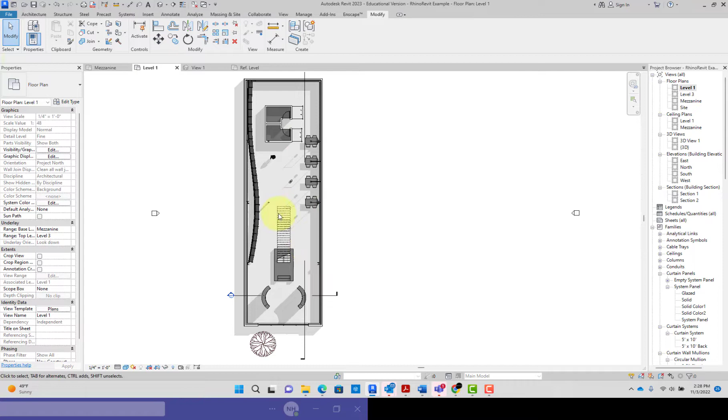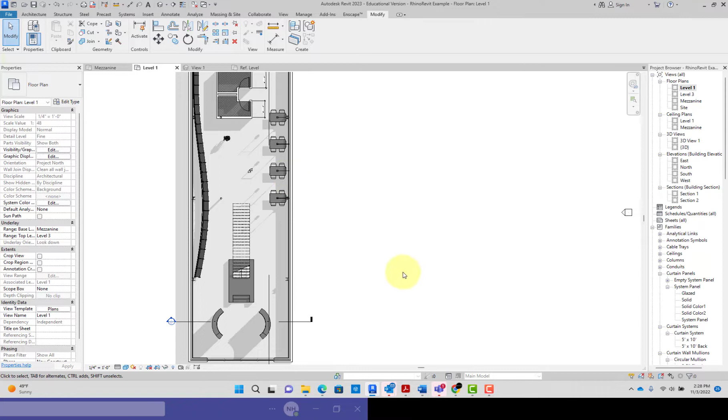Okay, the next thing we're going to do is add some control joints to your drawings. So if you have a monolithic concrete floor, maybe it's terrazzo, or it's anything that gets poured in place that is large, say an entire building or maybe an entire room that doesn't have anything breaking it up, like a tile pattern breaking up the tile into individual tiles. In this case, I have concrete, so you would want to place control joints as a designer, but it's important that you think of them as design intentions. Instead of having a very monolithic form, we want to break it up so it has more of a scale to a room or to a human body.

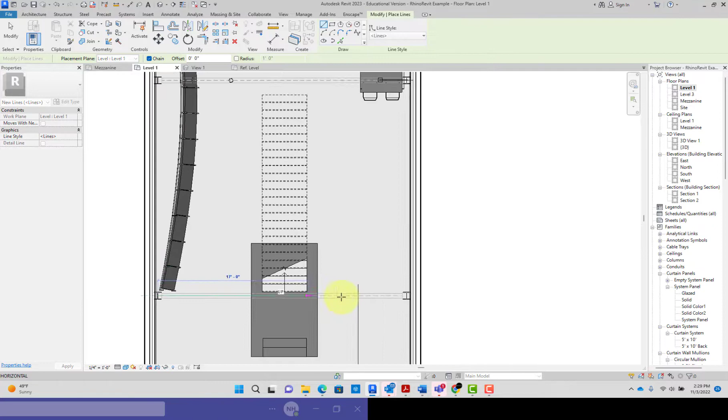So what we're going to do is use model lines. The beauty of model lines is that they're drawings that show up not only in the view you're in, but in every view. Specifically, we're trying to get them to show up in 3D views.

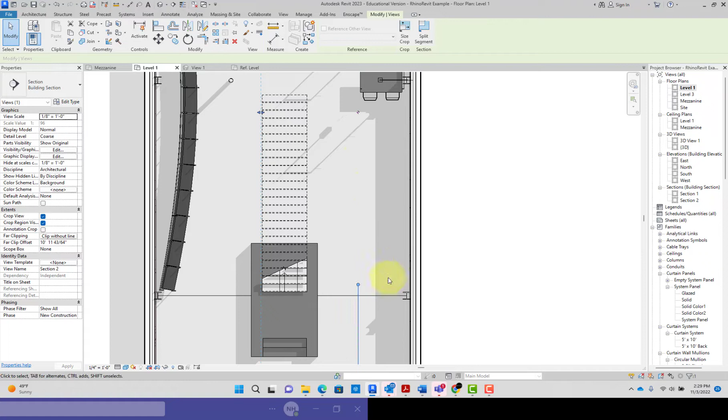I'm going to change the lines because I probably don't want a green line, I'll just call it out as a thin line. So it's there, let's go ahead and repeat it another time. You can see that I'm attaching it to, or aligning it to, the structure, and that's on purpose.

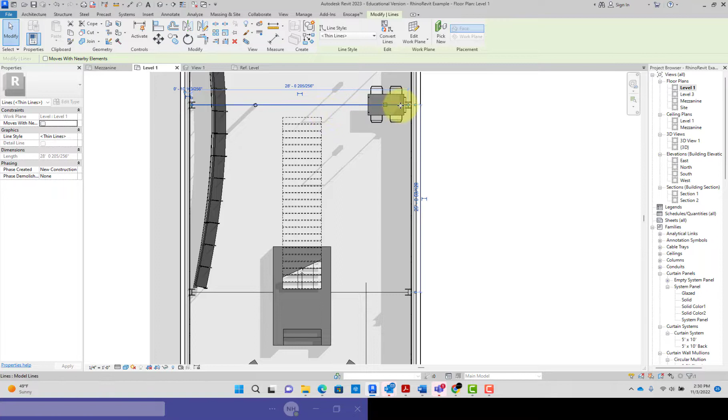What I want to do is, normally your control joint basically defines where the concrete or monolithic material will crack. It may crack other places, but if you don't do this, it's definitely going to crack somewhere. This gives it a natural weak spot. This control joint actually cuts into the material, usually about 3/4 of an inch to an inch, and it's a groove that's normally about a 1/4 inch wide. That allows for a weak point in the concrete, so that within that 1/4 inch joint you would often see a crack happen. But nobody will see it because it's below the surface and it aligns with a negative space, a little gap anyway. So that's why we're doing this.

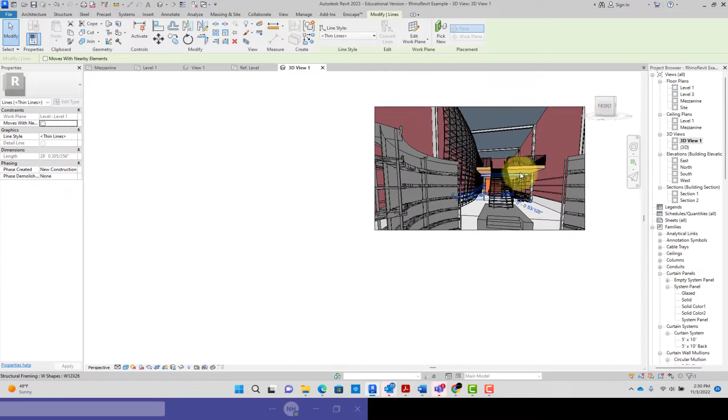And so if we look at the 3D view, we can see that those model lines show up here and here. So they start to break up the space a bit into these kind of cells or portions of the space.

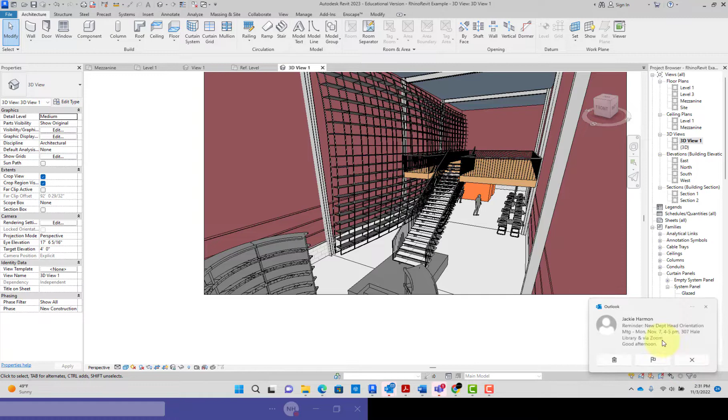As we are thinking about aligning our design ideas with the structural bay, which is always a good idea, these control joints start to align with some intentional moments within your composition. Okay, so now let's rinse and repeat this a few more times.

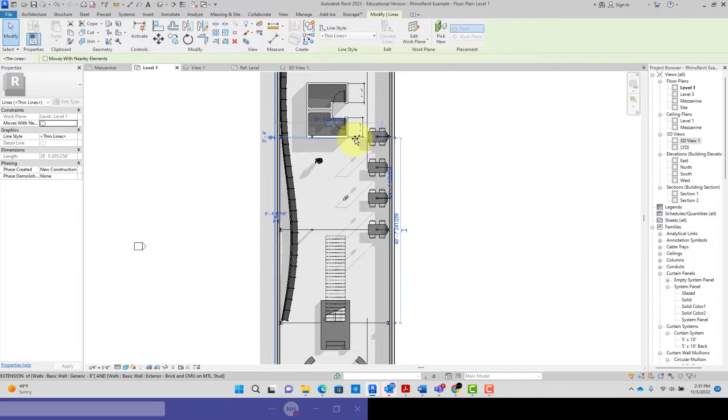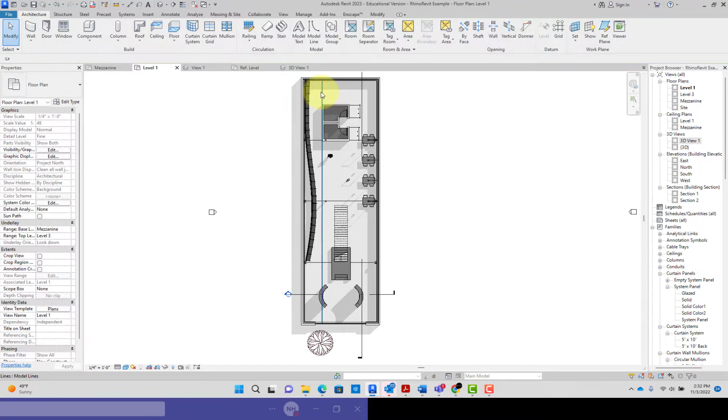Other things that I might do is look in the other direction. Right here I have kind of seating and one bay, then a middle bay that has all the stairs and this restroom mass, and then shelving on the other side. So it might be worth it for me to start defining my control joints, also breaking up this larger cell into smaller pieces.

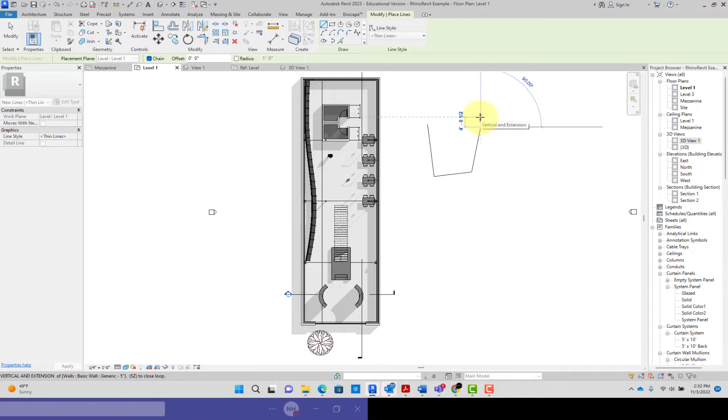So go back to thin line. If you want to always have thin line selected, at least for the time being, just deselect everything, go to model line, and select that. So now every time I draw, until I decide to change it, I'll be drawing thin lines. That's just a helpful hint.

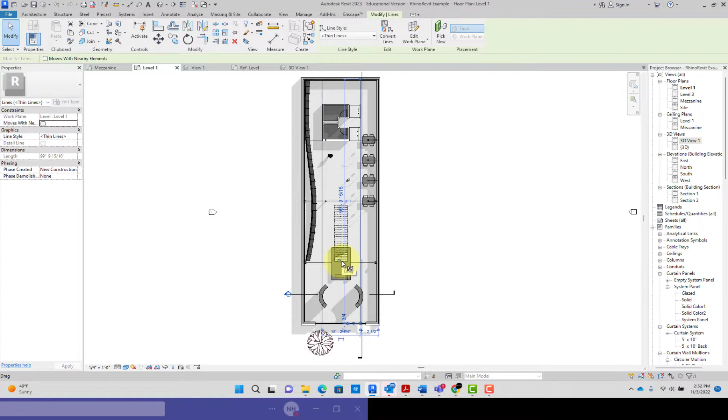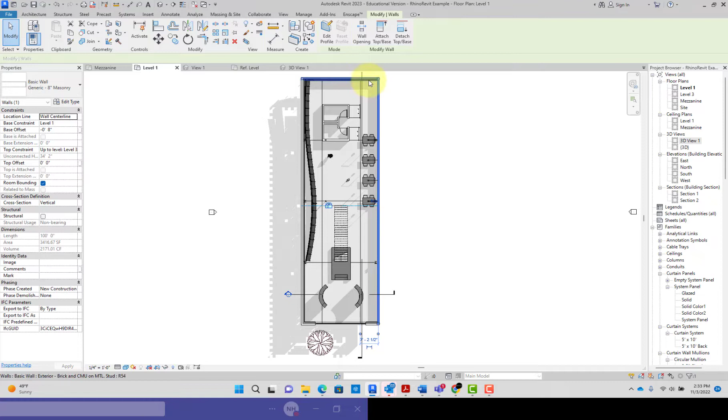All right, let's see if I can find a mirror. Okay, that'll work. All right, so we go back to the 3D view, and the space is breaking up pretty nicely. That looks good. We'll go back to level 1, and I think I need to get this changed out while I'm at it. This has nothing to do with anything, I just think the material is not what I wanted.

Okay, so let's look at what happens in Enscape, because unfortunately this is where I haven't figured out a solution yet. I'm working on it. Enscape does not recognize model lines, I really wish it did, but it's only going to grab surfaces and render those with material. So it works really well for a lot of things, but apparently we can't get it to work with model lines.

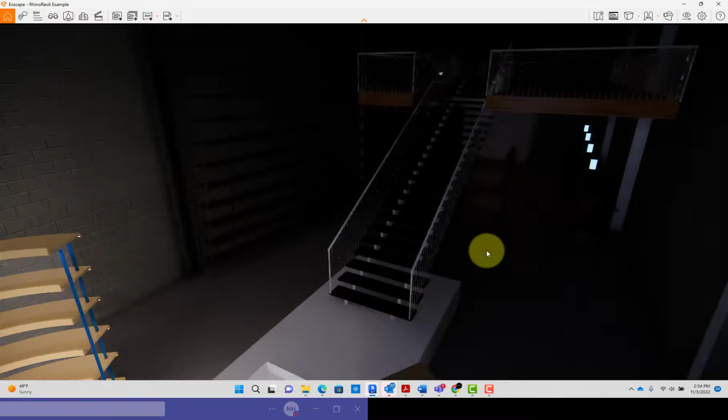So I'm going to see if I can work out another viable solution. If we look at it here, we see nothing, no difference in this flooring.

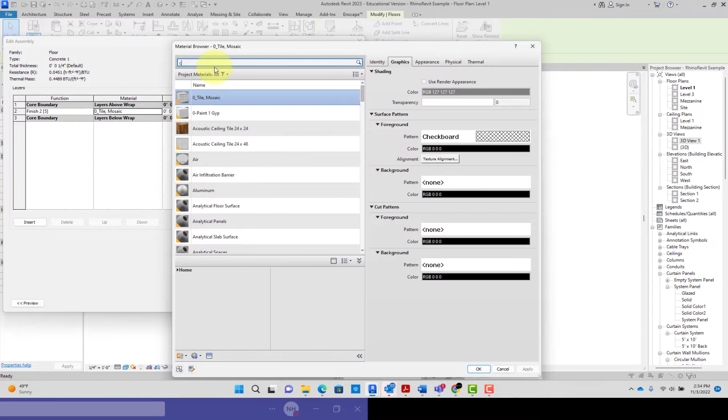Okay, so what I want you to try, and what I'm going to attempt here, is I'm going to go in and, just like we created that ceramic tile, duplicate that. I'll call this out as concrete 1, since I'm doing concrete. And I'm going to edit it, using the concrete I've already labeled, concrete 16, that's fine. Say OK. Then I'm going to duplicate that, call it concrete 2, that's great.

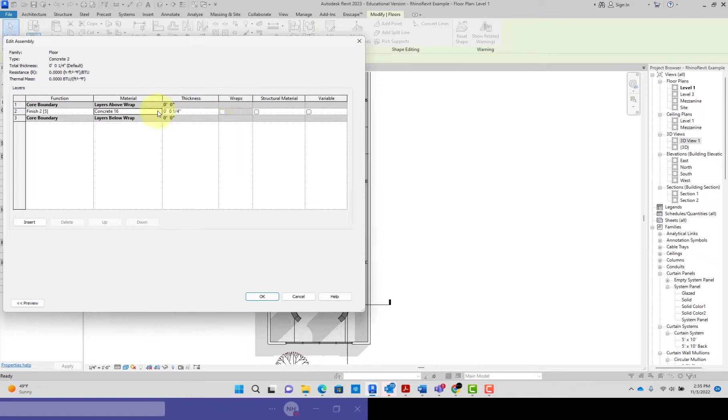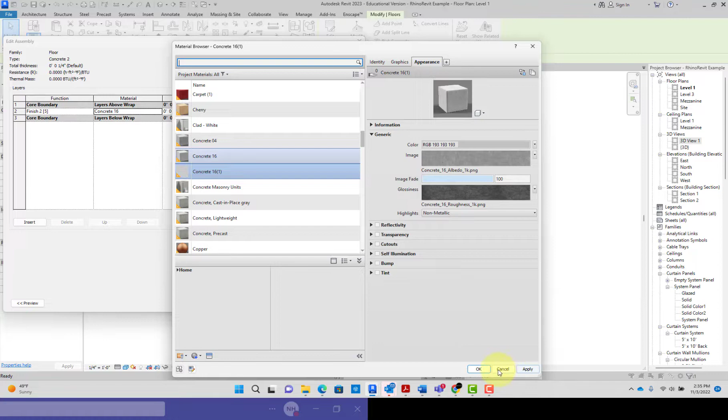Go in here, do this, and concrete 2, just duplicate material and assets. Then I'm going to change its... not the tint, I'm going to give it a very slight, subtle shift in darkness, as if I stained it, and apply that. Let's go ahead and create a second floor. Yay, okay, let's try it.

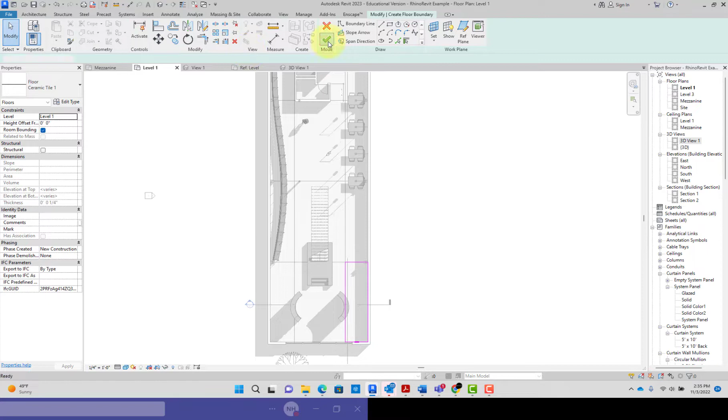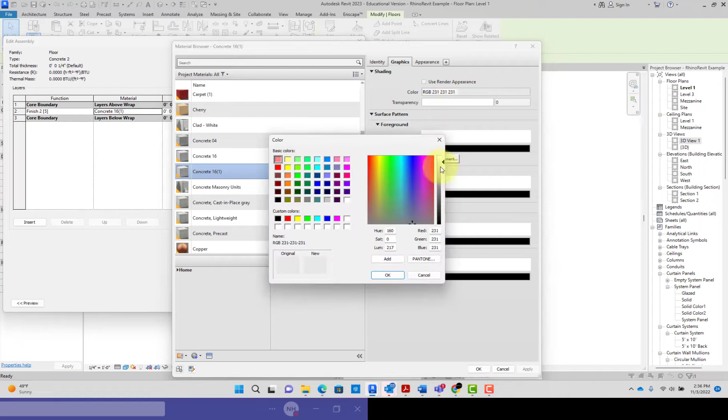We'll see what happens. All right, let's do just right here, there, and that works. It's telling me I've got overlap, and that's fine. I apparently did not choose the right floor type, I'm going to go to concrete 2. And just so I know something happened, I probably should go in and edit the material that it shows up, just give it a slight shift.

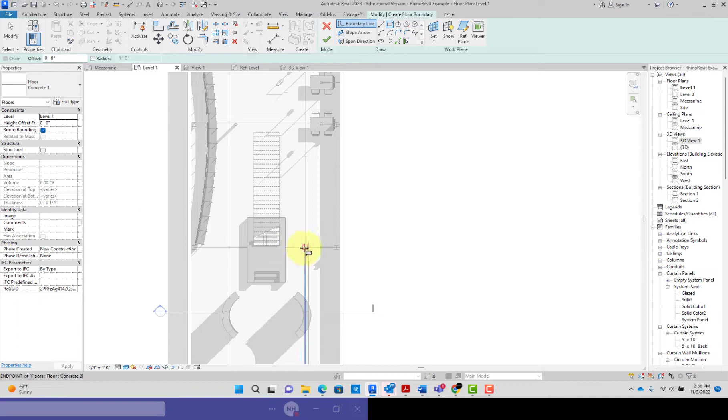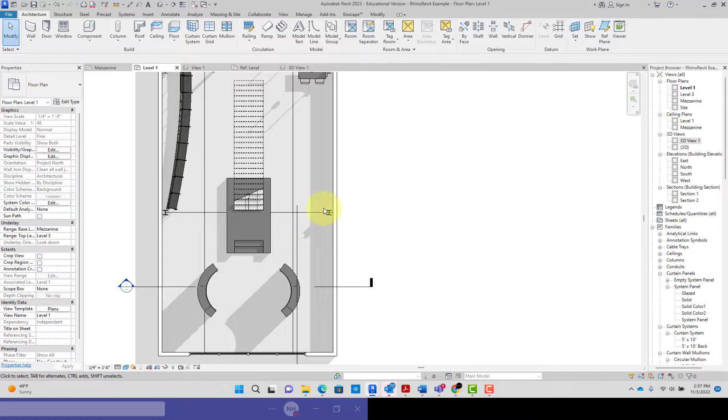Maybe it wasn't slight enough to show up, but we will now apply a concrete floor, but this time use concrete 1. And we'll do that right here. Okay, all right, so I have that and I have that, and now let's just go ahead and look at Enscape and see what it gives me.

Obviously that did not show up, so let's just go in and talk about what we're going to do. We're just going to take those floors and raise them up a quarter of an inch. So now we hopefully see them.

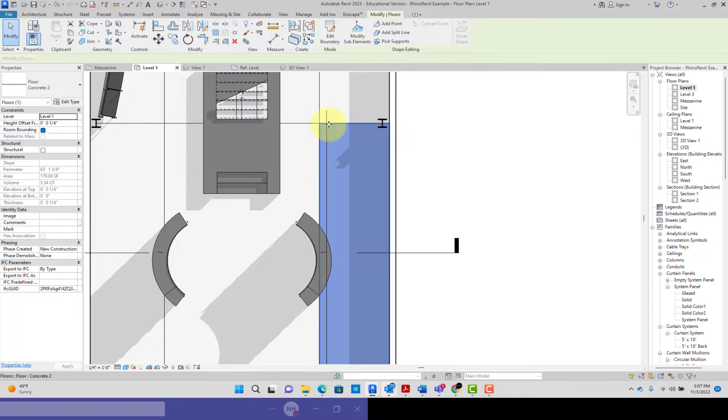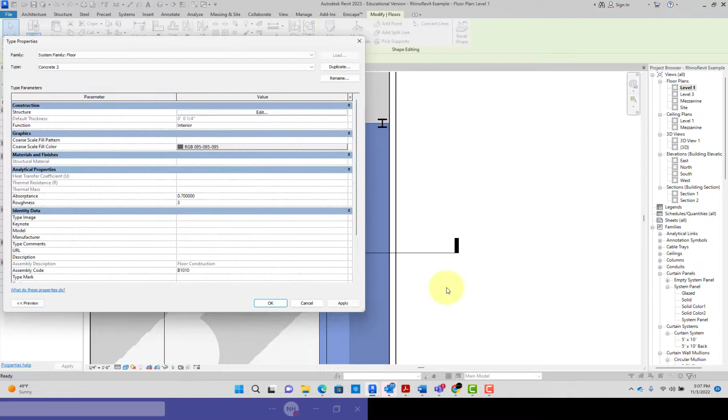The other thing that I did is I'm going to edit this concrete 2 material, and under appearance, I'm just going to give it a slight tint, a darker gray, somewhere in there. Or I change the graphics appearance so that it'll be a little bit darker. So that's why we see it, at least now, here as a shift. Probably a little too dark, but okay.

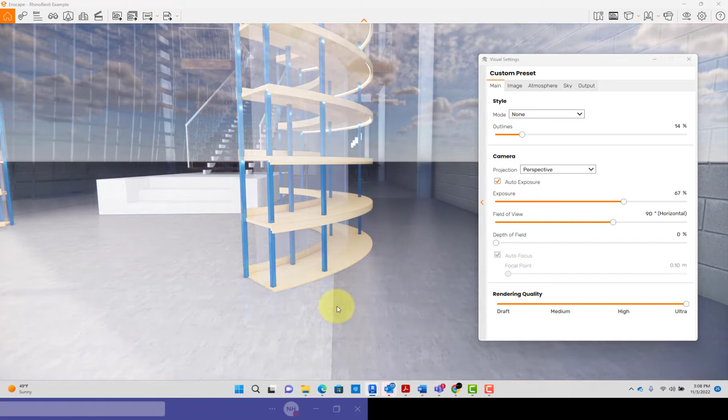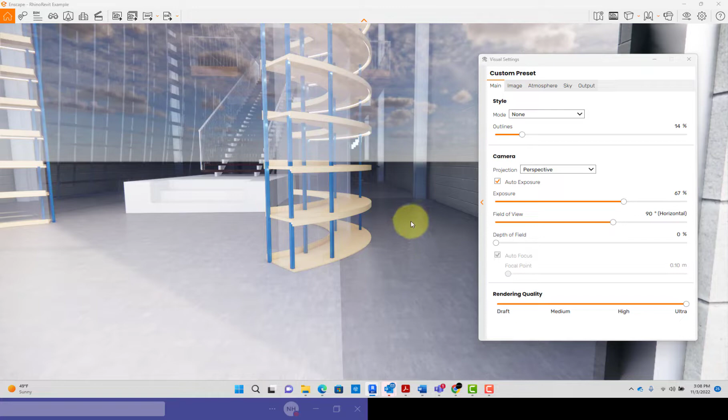We see it. Now we go to Enscape and we start to see that there's at least some denotion of it. It's not that you would always shift the color for a control joint. This is just to show, if somehow you want in your design intent to show that it actually is going to be a different color, or it could be a different materiality, like concrete for the main traffic zone and then maybe a wood flooring for something else. But let's stay on this track of how do I show control joints.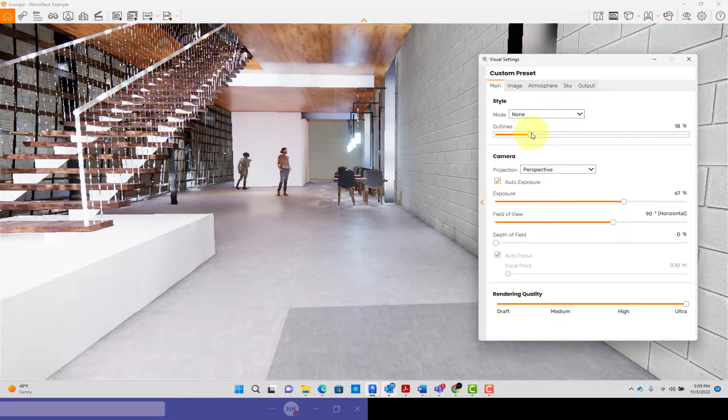Because you'll see as we walk through, right now, because we really haven't added the extra flooring, we start to see an outline. And the reason for that is right up here, you see outlines. And you can go to very cartoony, very illustrated. I don't recommend getting that intense. I would probably keep it around 25 to maybe 20%.

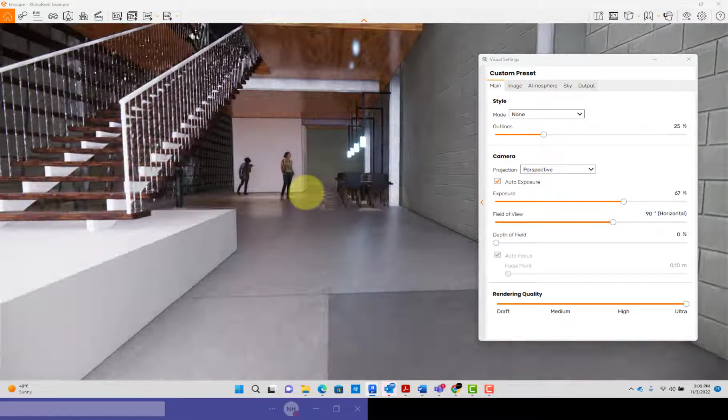And I think what I like about that, oh, I'm noticing my structure is not right. But what I like about that is that it just gives it a little bit of an illustrated look. It stops trying to be photorealistic. And then, if you do have some subtle shifts of materials turning the corner, it actually kind of clarifies that edge, which I think is good.

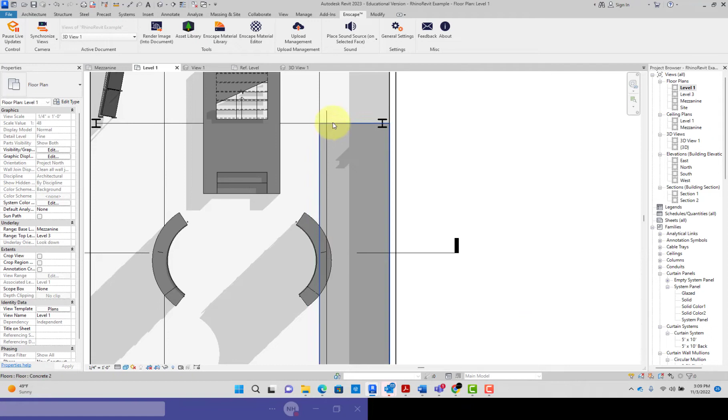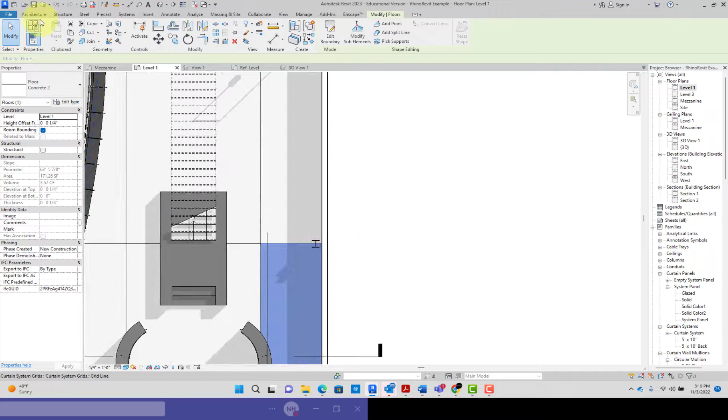Okay, so what happens if we continue that idea on and on? So I'm just going to take those two pieces. Let's see, I think this one needs to be built a little bit further. So let's just draw up a few more of these floor objects. Go ahead and call it out at 0.25, 0.24, 25 inches.

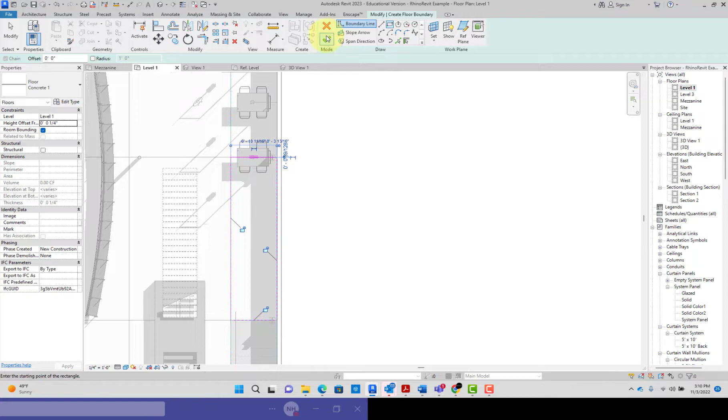And this is when it's going to get a little trickier. So let's add concrete to one more, so one more set.

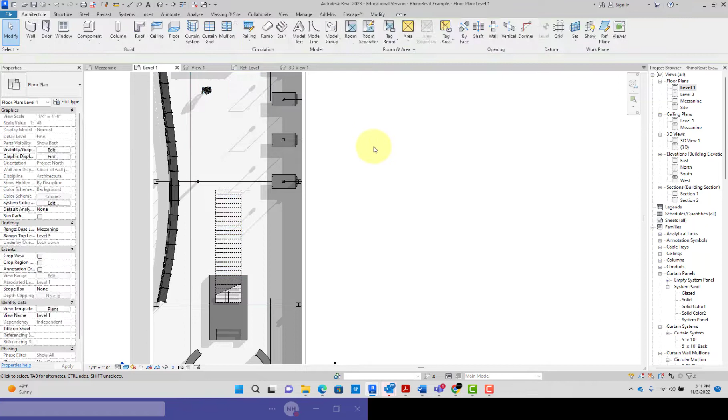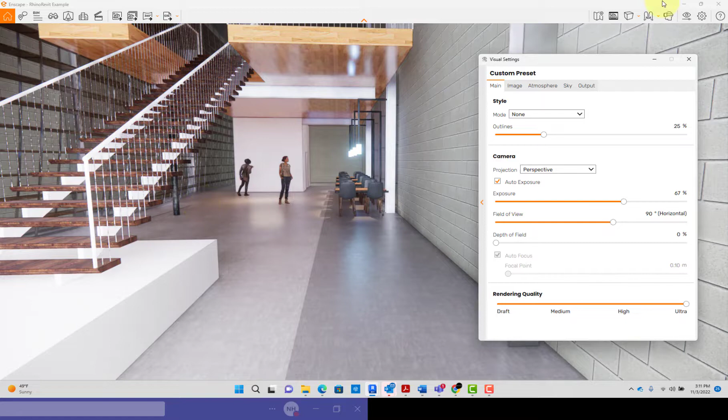Okay, now let's see what happens, because I think we're still going to have an issue. See, because now everything's at the same level. It was showing that line, that outline before, because it changed by a quarter inch. And you can still see, because right over here we don't have the extra floor, you can start to see the outline still there. So I wouldn't worry between two pieces that are already differentiated by different material or different color. But where we might want to get it is in this scenario.

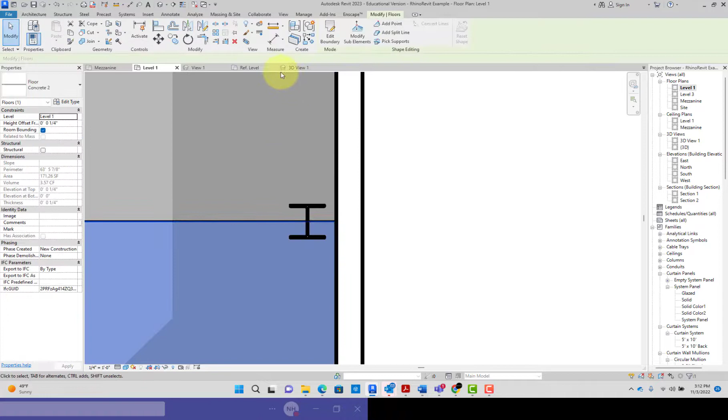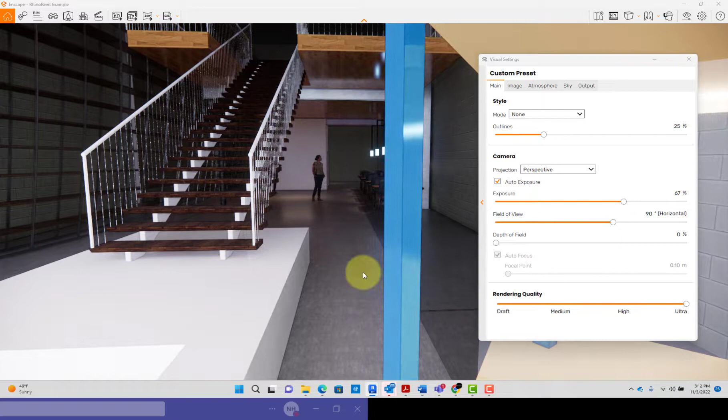So what I'm going to do, because this is not a shift in material, I'm just going to go in and edit their boundary, just slightly, just one arrow click, use to both of them. And then let's see if we can't start to see it. Okay, yeah, so then that worked out really well. Because there's that little gap, it's kind of denoting it. So we'd want to do that between every piece.

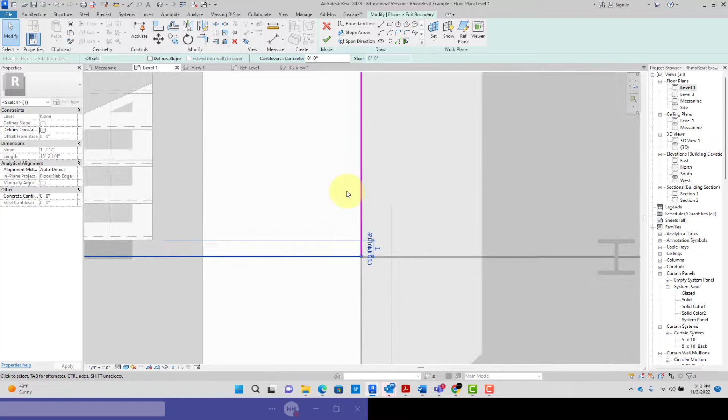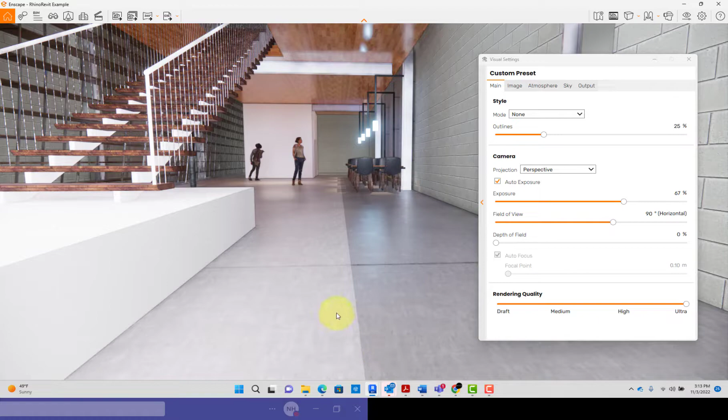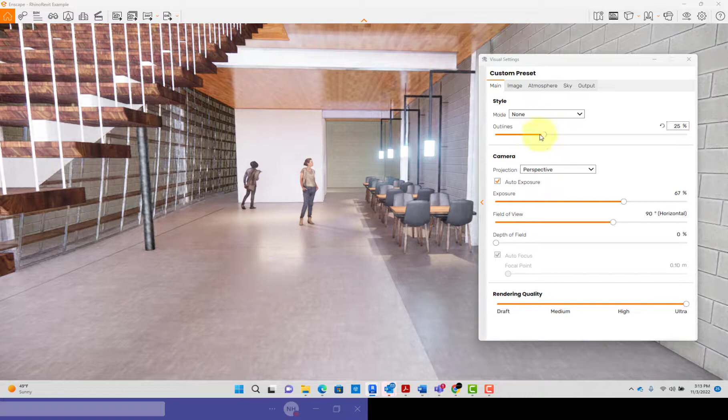So I've just done one click up here and one click down here. And let's just see if that does it, just if I modify one. That gives us the idea. Yeah, see, it's pretty subtle, but I think I'm kind of liking that notion. I didn't do it here, so you won't see it right at that place, but it just gives us that reading just very slightly on, and I don't want to go any higher as far as the outline, but you'd have to turn the outline on. Otherwise, it's very subtly there, but it's not quite apparent.

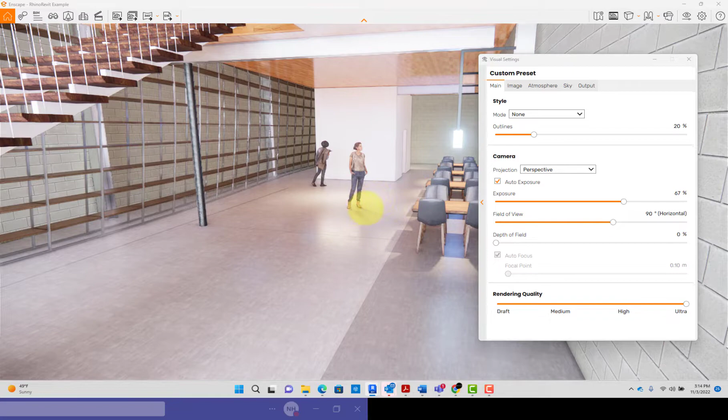There you go. That's how you'd add control joints. A little fussy to get it to show up in Enscape, but may be worth it depending on how critical that becomes part of your design.

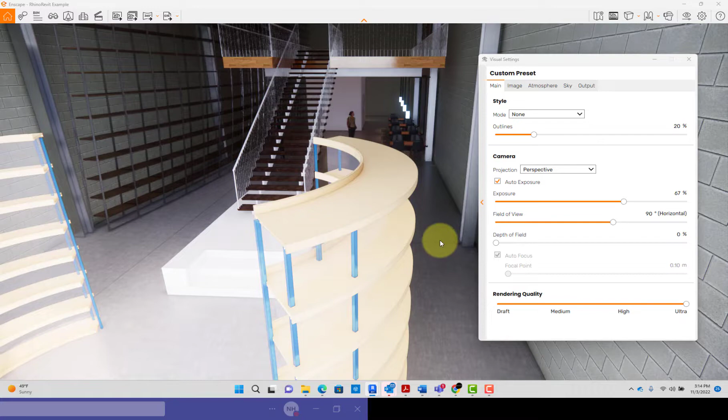What I would like you to do is just go ahead and show the nature of that, so we'll see it show up maybe in your sectional perspectives. The notion that you've started to fill in a few of those control joints, so we know that you know how to implement that.